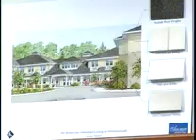Importantly, this application contains no variances. The property, as you are aware of its location, is 8.946 acres, otherwise known as Block 182, Lot 37. It's a permitted use in the Highway Service Zone District.

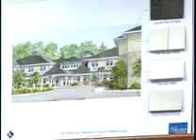We are requesting, although there's no variances, design waivers. Those design waivers are as follows: providing a 25-foot two-way aisle versus the township's ordinance requirement of a 30-foot two-way aisle, and secondly, for undersized parking, we're proposing 10 by 18 parking spaces as opposed to the ordinance requirement of 10 by 20.

Unless there are any legal questions, I would ask that the board, Mr. Bernstein, swear in all 4 witnesses, and we can proceed to Mike Ford's testimony on the site plan.

Just for the record, we're going to let the person who's been swearing people in for the last 15 years, Lucille, swear them all in. I think maybe you got a promotion. I'm not so sure I want it. Can we just do one at a time? Is that okay? Do we have to do it before? Just do it one at a time. Mike, it's Mike.

It's on already, he says. It's on. Raise your right hand, please. Do you swear to tell the truth, the whole truth, and nothing but the truth, so help you God? Yes, I do. Thank you. State your full name, please. Michael Ford, F-O-R-D, with Van Cleef Engineering. Thank you.

You swear to tell the truth, the whole truth, and nothing but the truth, so help you God? I do. State your name, please. Stephen Humphreys from EGA Architects. Scott Kennel, with McDonough and Rea Associates. Do you swear to tell the truth, the whole truth, and nothing but the truth, so help you God? I do.

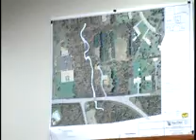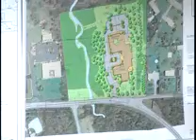Good evening. I'll first describe the three exhibits we just marked, from left to right, A1 through A3. The left exhibit, A1, is an illustration of the existing conditions, one of the plan sheets in the site plan set, colorized for this evening's meeting. A2, in the middle, is the site plan with the landscaping illustrated in color, similar to A3, the right-hand rendering, except A3 shows the future conditions with the realignment of Route 206.

This site is located just north of the intersection of Route 206 and Old Somerville Road, and also just north of where the northerly terminus of the bypass would intersect with Route 206, right around where the firehouse is. In the future conditions shown on the right, the frontage of this property would have the alignment of Route 206 softened with a curve, pulling Route 206 further away from the property to the west, with dual lanes north and southbound and a concrete median in the middle, similar to the northern section of Route 206 by Duke Farms, completed some years ago. Therefore, in the future, site access to this property would be limited to a right turn in, right turn out only.

As stated, it's an 8.7 acre parcel of land in the Highway Service District. It would be serviced by both public water and sewer.

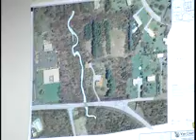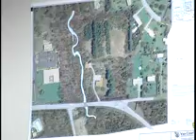The proposed use is a permitted use within the zone. Other permitted uses in the Highway Service District would be restaurants, fiduciary facilities like banks, medical or offices, and veterinarian clinics. This is an extended care facility, as Mr. Ogrodnik mentioned in the introduction of the application.

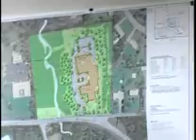As was stated earlier, we are requesting a design waiver for the parking stall size as well as the access driveway, which, as you've heard on many other applications I've represented, is common and helps us reduce impervious cover while still providing for safe and adequate access to the parking facilities.

There was a suggestion, and I'll go through the review memos in detail, but as I go through the testimony, I'd like to describe some of the comments we've received and some changes the applicant is willing to make as part of any condition of approval.

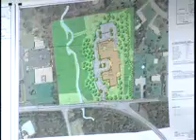There was a suggestion that the parking along the access driveway between the front of the building and Route 206 -- about a half a dozen spaces on the right-hand side and another 8 or so on the left-hand side, about 8 or 9 of those within that area between the front of the building and the highway -- be relocated to an alternate location on the site, and we would do that. We've reviewed the site plan, and there's an opportunity to move about 8 or 9 spaces from that location to an area along the left-hand side of the access driveway near the detention basin, with no net change in impervious coverage. That same impervious area would be directed to the stormwater management facility on the site.

Let me discuss that at this point. At the rear left-hand corner of the developed area, and as I stated earlier, it's 8.7 acres of property, there's only about 4 acres, or less than half of the property, that will be disturbed by this application. The existing woods around the stream, as well as portions of the wooded area within a 75-foot buffer setback along the perimeter of the property, are not to be disturbed.

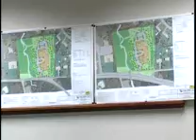First, we did make a visit to your Environmental Commission and received a review memo from the Environmental Commission, which includes a statement that the Commission has no issues related to this application. That's dated May 26, 2015.

We also received a review memorandum from Chris Wardinger, dated May 6, 2015. It contains 4 bullet points, and we'd agree to all those suggested changes to the plan as a condition of approval.

We've also received a May 14th, 2015 memorandum from your planner. There's 7 pages, outlining the bulk standards. As we described in our introduction of the application, we meet all the bulk standards and there are no variances required for this application.

There are 4 design waivers. I've already discussed 2 of those related to parking. The third is related to the township's stream corridor, which is actually more restrictive than the Delaware and Raritan Canal Commission stream corridor, but has within the township code latitude for the planning board to provide design flexibility to allow for minor intrusions into that stream corridor. For this application, there's a portion of the detention basin within the stream corridor as well as the access driveway right off of Route 206.

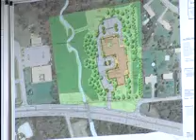Let me go on to your engineer's review dated June 2nd, 2015. Mr. White's memorandum has 7 pages. There are no suggested changes or requests for plan modifications that we have an objection to. On page 3 of 7, item 2, there's a suggestion there where the contribution in lieu of the sidewalks being placed along this frontage could be provided.

There was a request that we clarify whether there is employee parking. There is no designated employee parking. That could be administered by the operators of the facility. There's no specific designated parking. We don't feel a need for it.

There was a request regarding what's already on the plan on our southerly boundary. Our northerly boundary is the stream. Our southerly boundary is our closest residence. That's where the 75-foot buffer is being provided, a landscape buffer, and the preservation of the existing trees. We've also provided, in addition to the landscaping enhancements there and buffering, a fence.

It's been suggested that we provide some gates within that fence so that we can get to the other side of the fence for any potential maintenance needs. We would do that, provide 2 gates along that section of the fence.

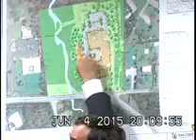Okay, yep. The front of the building is about 100 feet from the right-of-way of Route 206. What was suggested is to take the parking spaces in that area, which accounts for about 7 or 8 spaces, and find another place for them. The other place would be along this left, or northerly, side of the driveway. So these 6, and maybe 3 on the other side, would move. But the sidewalk along the frontage, or right in front of the 6 spaces, would go away.

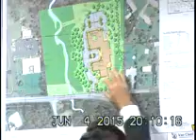But the sidewalk around the building that loops back in and comes along the driveway would stay. I think we're only talking about probably about 100 feet of sidewalk that would take you down to somewhere in the neighborhood of Route 206, and perhaps a better time to do that would be when there's a sidewalk along Route 206. But that's the common board's sense. I don't think the applicant sees it as a need for his operation of the facility, but we certainly understand the planner's comment and the town's incentive to encourage pedestrian viability.

So, no objection either way. Yeah, so I guess looking at it versus what's already planned, if you were to take those parking spaces away and leave that piece of sidewalk, just move it over towards the driveway, it wouldn't be much to bring that to the edge of your property. Now it would seem to hang in the air, but someday with a redone 206, it would make sense again—that being the point. Okay, if that's what you... and obviously no one wants you to build it along the frontage. That's all going to be changed. Okay, that would be silly. All right, great.

Okay, there were some other comments, but they would be for your architect. Item 5 is really for the architect.

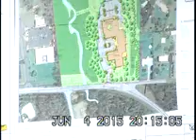removed due to the oncoming change to the road structure? Well, no, it's not so much removed, but rather would it be extended at that point? So if they brought it, it's not superfluous after it's done - it's not going to need to be removed when 206 is changed. No. If anything, what you'd hope is that the state would link through their property.

All right, I just want to make sure. I was trying to make sure in my head that we're not building a sidewalk that in 3 years is going to be torn up in pieces. No, that's why I'm saying only up to their property line, because the state could tear everything from their property line when they redo the frontage from their property. So there's no point building anything on the state's property.

Okay, yeah, okay, all right, never mind. Senior-itis.

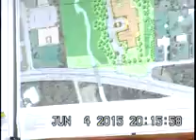Did you want to mention the fence? I was going to wait for the public to speak up regarding their likes or dislikes as far as the fence is concerned. Obviously there are some neighbors here who probably have property along here that want to speak up, so I just want to hear what they have to say.

Okay, but just for the record, I hate white plastic fences. Thank you, good, all right. But we're going to probably need a fence, so we're going to have to find something.

Any other board members? Yeah, Susan likes white fences. She thinks I'm funny.

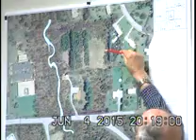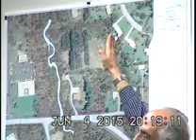Okay, so these white pines here, there are a couple that are still standing, but the majority of them went down during Sandy, and they are, as I say, 5 of them are just like dominoes, one on top of another. One went on another and then pushed them all down. So they are no longer in existence, and we would like to try to have them replaced by similar types of trees.

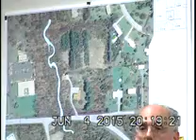Mr. Ford? Yeah, consulted with the applicant. We would agree to that as a condition, clean up the dead or diseased trees and supplement with other evergreen trees.

And actually, we're proposing a berm beyond that area within the 75-foot buffer with the plantings on top of it, since the plantings at the time of planting are not 20 feet high, so the berm would give us better coverage.

And that's beyond the parking area, and this is planning detail we've considered in the layout of this application, is that the parking spaces are oriented such that the cars, when they pull in and out of spaces, are not with their headlights into our neighbor's rear yard. They're in an east-west direction instead of north-south, so we're not facing our neighbor.

And part of this stream corridor encroachment, the portion of the detention basin, you'll notice that the building is kind of, I'll say, skewed counterclockwise to the property line. That allowed us to provide for a better green area in back of our neighbor, that's our closest neighbor, with a uniquely shaped lot without a great substantial rear yard, and we were cognizant of that and considered it in our layout.

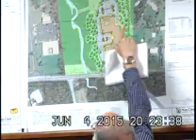There's one other point I wanted to make - if possible, we're taking out 8 parking spaces in this area. And right behind our pool is the service area with the dumpsters. If those dumpsters could possibly be put into that area where there's 8 spaces...

Code doesn't permit it, I don't think the code would allow that. But we'll make sure it's screened as best as possible - that the dumpster area is screened itself. Yes, it's also in an enclosure. Okay, it's an enclosure. Excellent.

Thank you. Do you want to come up and make a fence suggestion? Go ahead, go ahead, don't be shy. Come up and make a fence suggestion if that's all you want to say. It's democracy at its best. Okay, stop making fun. Just, you have to say your name first, that's all.

My name is Jeanette Giuliano, and I live in Flanders, right behind the property. My main concern is that, well, obviously, the white fence is just not going to work. But could we do something that would be more of a natural fence, something that would blend - like a wood fence, but something that would blend like wood, so it would look more natural.

Or wood-like - you know how they do vinyl, have wood-like board, artificial materials that look kind of like wood. For me, that would be fine. I'd prefer not wood because wood will definitely get destroyed over a long period of time and it doesn't age nicely. Right, which I understand, but that's what I'm saying - if there's other materials that would blend better with nature, it would be a little more appealing to everybody concerned.

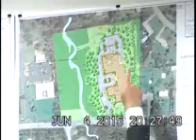The berm - I thought it was going to be in the south. Here, I'll show you on the exhibit. The berm is part of the water retention program for surface water. It's right here, a small berm just beyond where these parking spaces are, and it's far enough away from the property line so that we can take the drainage that does drain toward it around it, and it's not so long that it makes it difficult to do that.

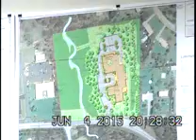Yeah, my only concern was the length of it. It's not long. Okay, all right, I'm familiar with what you're saying - like instead of a white fence, you make the wall a berm. Yeah, this is a short berm, closest to the property, for the most sensitive area we thought - our closest neighbor. It's not along that whole boundary, it's really in that one isolated area, and again it's really to provide for better impact of the initial plantings. Okay, good, all right, then we can proceed.

Could you please state your name for the record and your qualifications as a traffic consultant? Yes, Scott Kennel with McDonough and Rea Associates located at 1431 Lakewood Road, Manasquan.

I have over 35 years of traffic and transportation planning experience. I've prepared over 500 traffic impact studies. I've testified in over 100 municipalities, including Hillsborough - it's probably been about 10 years since I've been here. One of the projects I worked on was Hillsborough Promenade, where I attended many hearings for that project. I've testified in probably 8 other communities in Somerset County. I've been qualified by the New Jersey Superior Court as a traffic expert on 3 land use matters, and I'm very familiar with the NJDOT access permitting process, having prepared over 300 access applications.

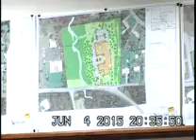I would ask a question on jurisdiction, given it's a state highway. What do we have or don't have here, given that it's not a municipal road and it's a state highway?

I would probably caution the board that if they wanted to make a condition relative to left in, left out, that it is going to be subject to DOT. If the board wishes to make that a condition, I don't think it is against the law to do so, with the understanding that if the state overrules you because it is a state road, then the state is going to have precedence. But if you want the state to understand your feelings on how you want the movement to go, the best situation would probably be a condition to the approval of the application, and let the applicant advise the DOT accordingly, and then it's up to DOT whether they want to accept it, reject it, or modify it.

This area has always been a big safety problem for this planning board. We had an application in the 1980s for Lot 4, Block 181, across the triangle where the billboard used to be - it still shows on your drawing. It was a site plan for an office building. We denied it, it was appealed, and it went to the appellate court, which upheld the denial based on traffic only.

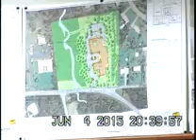Bill? When you have modeling, that doesn't always mimic real life. It's theoretical, so your experience trumps modeling - your personal experience. You guys have been here for many years, you've seen how the town's growing, how the traffic's increasing, and what's happening in specific hot areas, and this is being a hot area. That's the reason for the bypass. That's a scary hot area.

I've tried to do Doctor's Way - I've been in there too. You just make the right, I go home the other way.

If the board wants right in, right out - well, that's going to be a future condition anyway, so you might as well get used to it now. We're gonna have to have right in, right out anyway, so why are we even moving down this way? Common sense dictates that in the near or far future, you're gonna have right in, right out no matter what. We all know that - eventually it will get built, and eventually it won't allow you to make the left, so let's just get away with it and not even talk about it anymore.

I think the applicant doesn't have a problem with restricting it to right in, right out with signage. Okay, all right, we're good. I agree with that, but again, it's a jurisdictional issue. Well, we understand that the state could override it, but from our point of view, it's a no-brainer - we can't approve this without it being right in, right out.

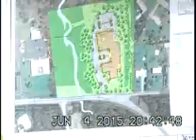Let's open it up to the public. Public, does anyone have anything for the traffic consultant? I think we addressed the big thing, but sure, go ahead. Thank you - no, someone does.

Coming up. That'll be on. Green. Bill Trethaway, 1274 Millstone River Road, Hillsborough.

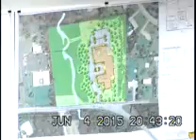Sir, would it be possible to design the exit so that the right-hand exit lane did a sweep to the north, so it would not be possible to make a left turn coming out of there? We could do that. The issue is the proximity to the stream corridor and the wetlands - we've got it as far north as we can. If we were to accommodate what you're suggesting and still accommodate trucks, we'd have to shift that driveway probably 50 feet closer to Old Somerville Road. Not to say it can't be done, but I think you want to provide as much separation from Old Somerville Road to the driveway as possible.

So that's why we suggested signage prohibiting left turns. If the board were to give a waiver for a little more ingress into the stream corridor - we're not allowed to do that. Can't do that for the stream corridor? No, we can't do that. I don't know the class of stream.

That could be addressed with painting and triangling too. We can, but a lot of times you'll use a physical island. But since we've also got to service trucks and delivery vehicles, you need a right turn in too. We could put something down - we can try to enlarge the curb returns a little more and provide some striping to encourage and enforce that right-in, right-out. Yes, painting would be good.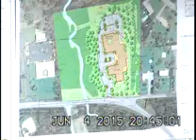Okay, so the applicant would agree to striping and signage. Thank you. Thank you.

Our last witness for the evening, unless there are questions for the developer, is Stephen Humphreys, our architect. Yeah, we do have one question for the owner about the memory care beds, but we'll get to that. I'll bring your architect up. That's fine.

Right, Marcia, you had that question here.

Is this on? My name is Stephen Humphreys. I'm from EGA Architects, out of Newburyport, Massachusetts. I've been with the firm for 18 years. The firm has been designing senior housing for 46 years, and that's all we do - we specialize in senior housing.

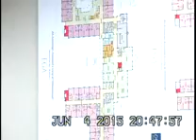Okay. I'm going to go through the exhibits. On the far left is Exhibit 1, which is the first floor plan, that's A4 for the record. The next exhibit in the middle is A5, which is the second floor plan. And the final exhibit on the right is an exterior rendering of the front of the building.

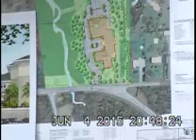For reference, I've got the building oriented the same way as the site plan, so you can see what you're looking at. You enter the site from the west, and as you drive up on the north side of the building, the main entry is... I need to get closer to the plans.

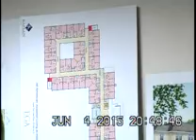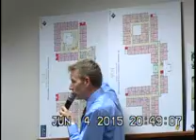First floor plan. You enter from the west, then you come up into the entry drive. The building is, I'll just repeat, 2 stories, 58 units. It has assisted living and memory care. As you go into the main entry, there's a covered walkway, and you enter into basically the administration area, the common areas. There's a commercial kitchen. This is kind of the core of the building, where all the services happen.

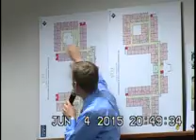There's several outdoor spaces off the core. There's a patio in the back, and a patio down onto the west side for the residents. On the bottom of the plan are the assisted living apartments. On the top of the plan is the memory care wing. This is a secure wing, separated from the rest of the building, but it has its own dining areas and living room, a staff area, and there's actually 13 rooms in there.

24 beds. Hold it down. Just hold it. Hold down the button. Hold it down until the green light comes on. Hold it down. There you go. Is it on? Okay.

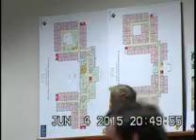The second floor plan, which is the middle exhibit, is generally all assisted living apartments. There is a rehab room in the center. There's the 4 required egress stairs, and there's 1 elevator in the center.

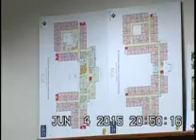There were 4 comments on the report I just want to address quickly through the rendering. This is a view, if you're standing roughly about here, looking off to the south. Here's the main entry with the covered walkway. There's a porch along the front.

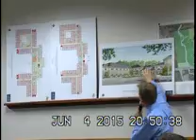Mr. Humphreys, you think it'd be easier if you do it sitting at the table? Oh, yeah. Okay.

So again, 2-story building, very residential in nature. We're using hip roofs, traditional residential siding, so it's going to be vinyl siding. There's a darker color at the base. The trim will be white. The siding on the second floor is going to be shingles, which will be a lighter color.

I do have another exhibit on the floor that has the actual samples of the siding colors, the asphalt roof shingles, and the trim for reference. Thank you, Michael.

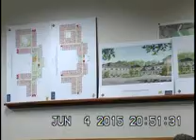So if you're looking at that board, the top sample is the asphalt roof shingle, which is a weathered wood color. The shingle below that is a vinyl siding shingle, with a 7-inch exposure. The white piece below that represents the trim. We're using white trim around all the windows, the lintels, the columns. And the bottom piece is the lap siding, which goes from just below the second floor windows down to the ground floor.

And I think that's it, unless anyone's got any questions.

Marcia? No, we're gonna have Marcia go first. I was just going to ask about the egress, because it's unlocked. Go ahead, Marcia. The township has what's called architectural site design guidelines.

And that's what we looked at, and you provided the building materials. Thank you for that. There was one question we had about the window treatment, whether it could be augmented and made a stronger element on the facade. The ASD guidelines talk about a defined lintel facade frame, drip molding, some additional elements to add variety to the facade treatment. Is that something you would consider?

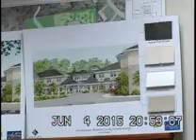We do have trim around all the windows. It's a 3.5-inch flat band of trim that goes across the lintel and down the sides. We also carry that trim horizontally between the bottom of the second floor windows and the lower level. And then we try to incorporate that trim with the HVAC grills that are below that with a panel, so we're trying to incorporate that into the architecture.

Well, that was another question we had about the utility boxes that are beneath each window. Is there some other way of designing it so that it is eliminated, and there's a way of addressing the air conditioning and heating in another manner without breaking up the facade like that? I know I've seen a number of buildings that don't have that on the facade treatment. Is that something you'd consider?

The heating system and cooling system, let me explain what those are. Those are PTACs, packaged terminal air conditioning units. They were selected for the flexibility that when you have residents in this building, there's going to be some that are hot and some that are cold. With this type of system, you can always provide heating and cooling in different areas, and even within the different rooms, because they're all shared rooms. It's also an economic decision to use those as well.

So that's the only solution you have to eliminating those utility boxes? I can't get rid of the grills. We need the grill for the fresh air intake. And if I didn't have those, we'd have some pretty large rooftop units and substantial ductwork going into the building to provide the fresh air. Which would be hidden under the roof? Yes. So it's not something that you'd consider? I don't think so.

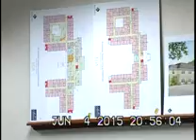Okay, thank you. Okay, Bill? Nothing? Okay, Board members? I just asked about the security access to the front of the building.

Security access, is there going to be some kind of automatic, I mean, are people just able to walk in and out, or is there going to be intercom-related security, considering the...

No, we did already, he's already good, yeah. Go ahead, we did all four. The building is open during the day, staff in the building 24 hours a day. The building is actually locked at night, and access to the front door, if somebody wants to come in through the front door, they have to ring a bell outside, and there's a full intercom system through the entire building.

All right, just for the record. Thank you. Is that design something you've built other ones of, or is that a fairly standard design, or is that something unique? This is a building that we had designed to be replicated. There are two of them currently existing up in Massachusetts. This will be the third, and there's two additional going up. So it's the first in New Jersey that you do? It's the first of this type of building in New Jersey, yes.

John? Yeah, is there emergency services, on-site generators or something to that effect, for a care facility like this? There is emergency generators on site. And is it enough for the power of the whole system, or just for the elevator? No, it's for life safety, so it's going to power lights, it's going to power some of the elevator, a little bit of the kitchen. And where are those units located? On the south side.

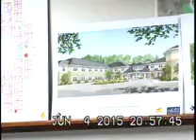So that's right next to the trash enclosure? Right next to the neighbors. There's a big buffer between them. And again, it's just an emergency generator.

White fence. So just going back, with the standard design that you've already done, do the other locations have that same heating and cooling approach? Okay, thank you.

Any other questions from the public on the site design? Not the site design, the building design as well as the site design? No? Okay, our last witness is Mr.

Glenn Kaplan, he's the developer. I think for the purpose of the record, Mr. Chairman, Mr. Kaplan can at least restate on the record what he previously stated minimally.

Just so you know, this is a building that has been replicated. The other two buildings look identical, right down to the last detail. There are two of them standing currently up in Massachusetts, and there's three more actually going in the ground this year. One in New Jersey and then two in other states.

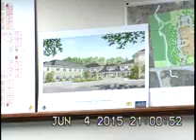I just have one more, and I think it's for the architect. I'm assuming there's no issue with external lighting that would affect the surrounding neighbors? We need the architect for that. Yeah, we provided a site lighting plan that shows there's no spillage onto the neighbors.

Any other questions from the board? Okay, motion to close public hearing? Motion to close. Second. All in favor, say aye. Aye. Okay.

What's your pleasure? I think that property has been underdeveloped for a long time. It's an eyesore. I think this is a nice, clean use for the property, especially the fact that it's low traffic—as we know with the traffic coming in and out of that area, it would be minimal visitation—and they agreed to address the traffic concerns. I think it's a nice application, and a good rateable.

Anything else? Is there a motion then? I make a motion to approve this application with the amended restrictions that we placed, and all agreements prior to and post for our engineers and professionals.

With the understanding that as it relates to the DOT access issues, it is still ultimately subject to the state, as to the right-in, right-out, and the striping therein.